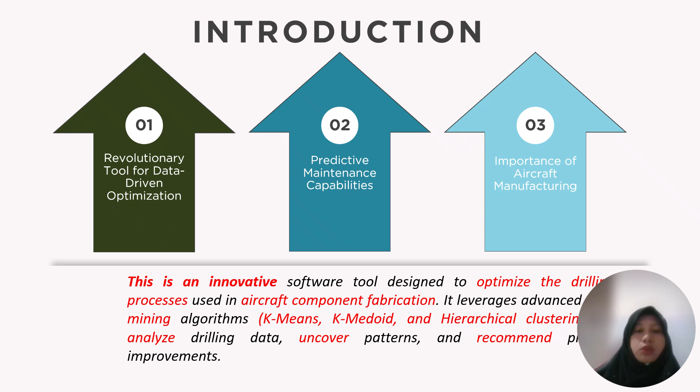A bit of introduction: What is Drilloptimax? It's a revolutionary tool for data-driven optimization and predictive maintenance capabilities, an innovative software tool designed to optimize the drilling process used in aircraft component fabrication. It leverages advanced data mining algorithms using three clustering methods: K-means, K-medoid, and hierarchical clustering. By analyzing the drilling data, it uncovers patterns and recommends process improvements.

A bit of project description on Drilloptimax: it transforms drilling into a smart, data-driven process for the aircraft industry. It analyzes surface roughness, circularity, and cylindricity, using advanced clustering methods to classify hole quality and reveal critical insights into process behaviors. Using this, engineers can now optimize feed rate, spindle speed, and tool path with confidence, supported by machine learning validation.

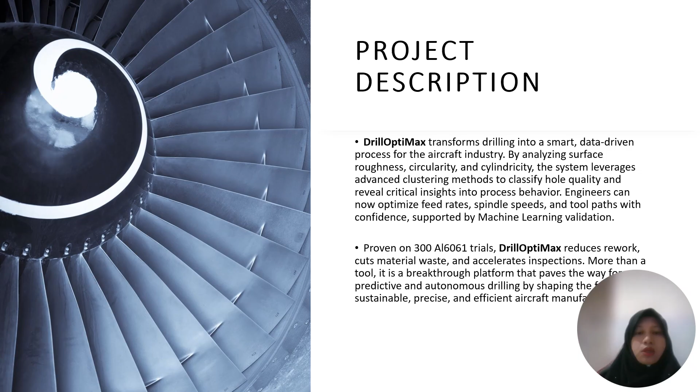This is proven using 300 holes on aluminum 6061 trials. It reduced rework, cut material waste, and accelerated inspection. It's also a breakthrough platform that paves the way for predictive and autonomous drilling, shaping the future of sustainable, precise, and efficient aircraft manufacturing.

It has a few objectives. Number one is improving manufacturing precision. It also optimizes process efficiency, enables predictive maintenance, enhances quality control, and reduces manufacturing costs.

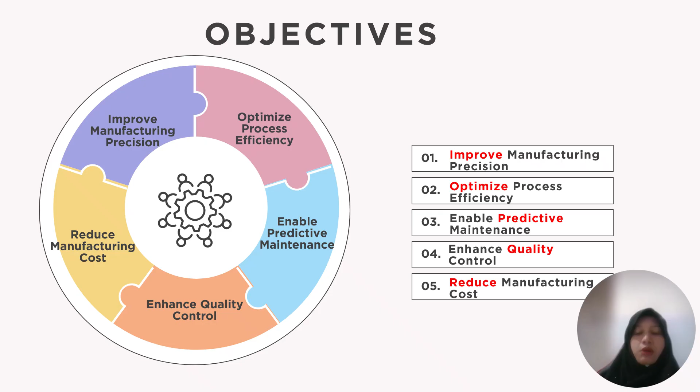In terms of novelty and inventiveness, Drilloptimax introduces the next generation integration of multi-metric clustering, unsupervised classification, and predictive analytics, specifically tailored for aircraft drilling operations. Unlike conventional inspection methods, it simultaneously evaluates surface roughness, circularity, and cylindricity through a unified clustering framework, enabling holistic assessment of hole quality.

Finally, by incorporating predictive tools, analytics position Drilloptimax not only as a diagnostics tool, but also as a forward-looking platform for autonomous data-driven manufacturing. This unique combination of multi-parameter intelligence, validation rigor, and predictive foresight distinguishes Drilloptimax as a pioneering breakthrough in precision drilling for aircraft manufacturing.

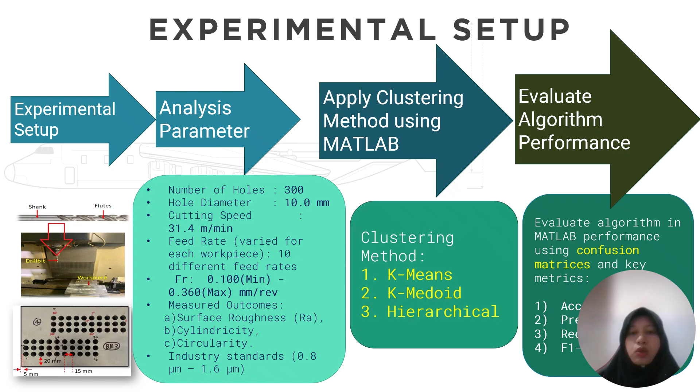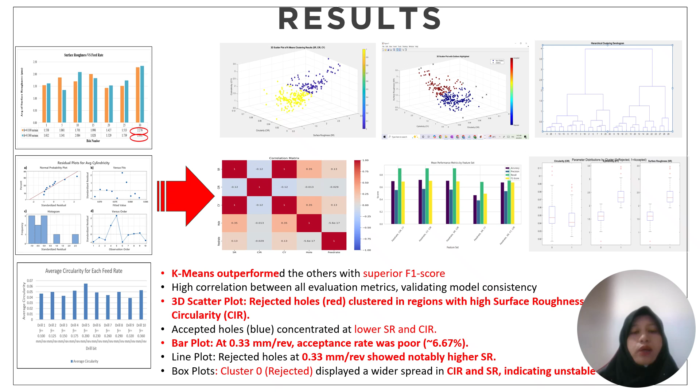On the bar plot, at 0.33 mm per revolution, the acceptance rate was about 6.67%. On the line plot, rejected holes at 0.33 mm per revolution show notably higher surface roughness, and the box plot for cluster 0 (rejected) displayed a wider spread in circularity and surface roughness, indicating instability.

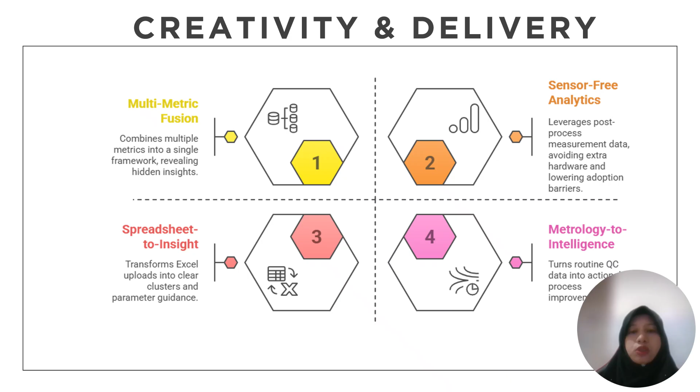On its creativity and delivery, we have multi-metric fusion, where we combine multiple metrics into a single framework, revealing hidden insight. It also has sensor-free analytics, leveraging post-process measurement data, avoiding extra hardware and lowering adoption barriers. And we have spreadsheet to insight, transforming Excel upload into clear clusters and parameter guidance. Lastly, it has metrology to intelligence, turning routine QC data into actionable process improvement.

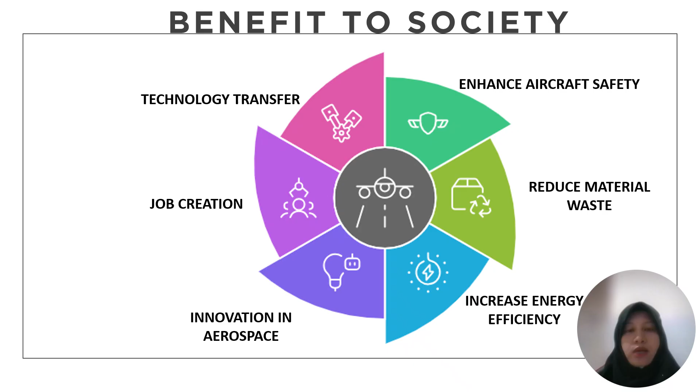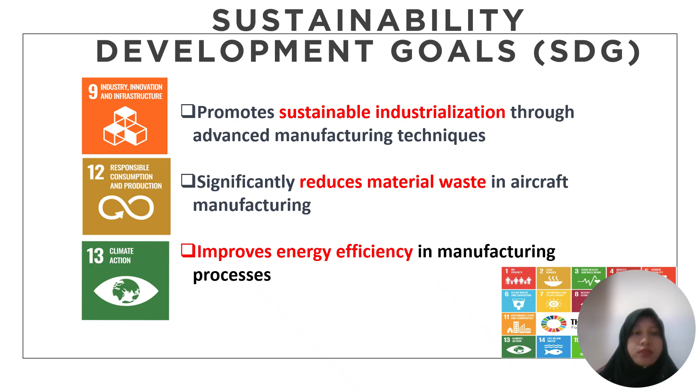Lastly, for technology transfer, the methods and tools developed can be applied across industry, driving broader industrial competitiveness and technological progress. For Sustainability Development Goals, we have SDG 9, 12, and 13. For SDG 9, we promote sustainable industrialization through advanced manufacturing techniques, and significantly reduce material waste in aircraft manufacturing for SDG 12.

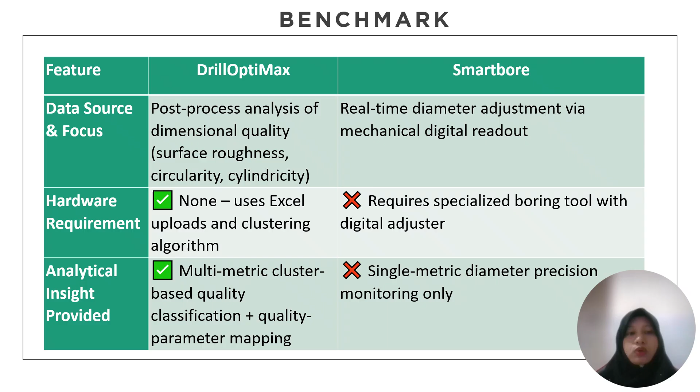On benchmark, it was benchmarked between DrillOptimax and Smartbore, where DrillOptimax won in the data source and focus, hardware requirement, and analytical insight provided.

For fabrication current trend in drilling, the contribution of aircraft components to aerospace revenue is approximately 55 to 60% of aircraft manufacturing cost attributed to components, including precision parts like drill holes, fastening, and structural assembly. Russia's industrial fasteners market growth is projected to surpass $2 billion by 2029, driven by demand from sectors such as heavy machineries, automotive production, and infrastructure development.

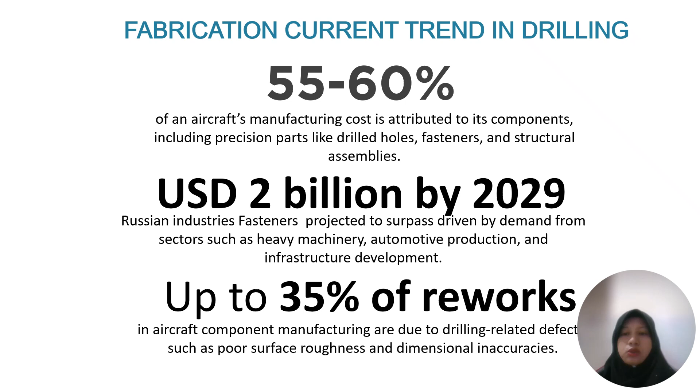Its impact on drilling defects on aircraft components rates up to 35% of reworks in aircraft component manufacturing are due to drilling related defects such as poor surface roughness and dimensional inaccuracies.

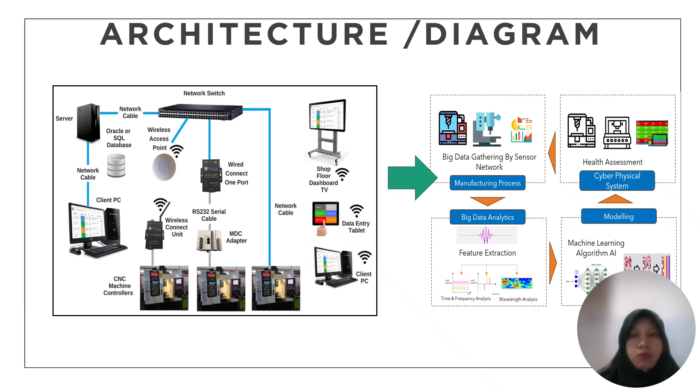Here is the architecture and diagram where it has a shop floor connected to a server where the user will collect data, and the data will be pushed for manufacturing process, cyber physical system, modeling, and big data analytics.